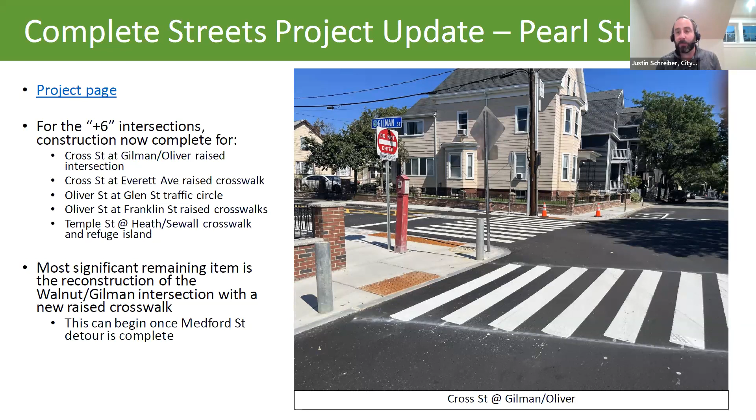As part of that, there's going to be a little 2-way bike lane to connect folks from the neighborway up to the community path. We're holding off on that because of the Medford Street detour, since there's a lot more traffic right now using Walnut, and it's just a little too difficult for the contractors to get in there right now. With any luck, in a couple of weeks we'll be done with that detour and then they can start that work. So we're still planning to complete that this year.

And then Pearl Street itself, sorry, this is actually an image over on Cross Street of the raised crosswalk, but Pearl Street was the big resurfacing project, and that's also pretty much complete. So from McGrath to Mount Vernon Street, there's renewed sidewalks, repaved roadway, some speed humps, even more raised crosswalks, and most of the pavement markings are in.

There's a couple punch list items still remaining, like some pavement markings, some signage, some flexi pave around tree pits—that's an asphalt that lets water go through it on the sidewalk. But for the most part that project is complete. These are just two more photos of the raised crosswalk at Oliver Street and Franklin Street, Glen Street at Oliver. So all in all, really a ton of very high quality traffic calming in East Somerville, which is extremely exciting.

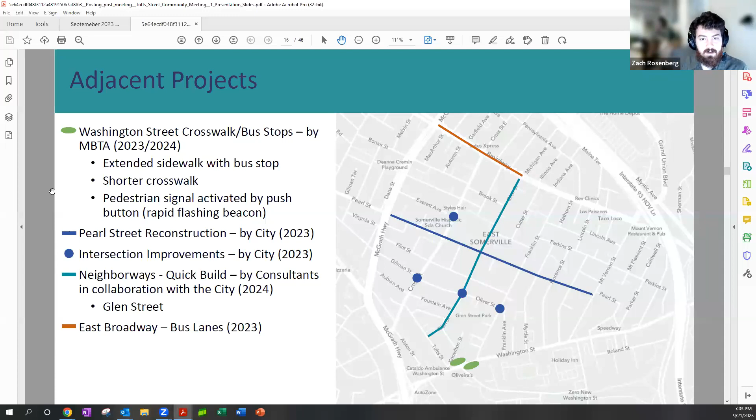I think one of the things we were wondering about is the 90 bus. It looks like it currently goes one way down Tufts Street. In the update I saw, you guys had said traffic changes were not on the table, but we had talked about the possibility of making it one-way in the direction the bus goes, or if the bus route still needs to go on Tufts Street with the bus network redesign.

Kate, are you able to speak to that at all? Yeah, and I'm sorry, would you mind clarifying the question? Are you asking if a one-way street is still on the table? Yeah, so I'm asking if a one-way street is still on the table, and also if the designs you guys have are taking into account the bus currently running on Tufts Street.

And also if you have talked to or heard from the MBTA about whether that route still makes sense, or if it does, maybe adding a stop on Tufts Street. So that was, sorry, multiple questions. That is totally fine, I'm just writing them down so I don't forget to answer them.

So maybe I'll speak to the first one, is one-way still on the table. What we shared at the public meeting is that we are not considering a network redesign for Tufts Street, and there are only two streets off of Washington Street that enter East Somerville off of Washington Street. So we would have to rethink many of the streets around if we were going to take into account one-waying the street, especially in the direction the bus now travels.

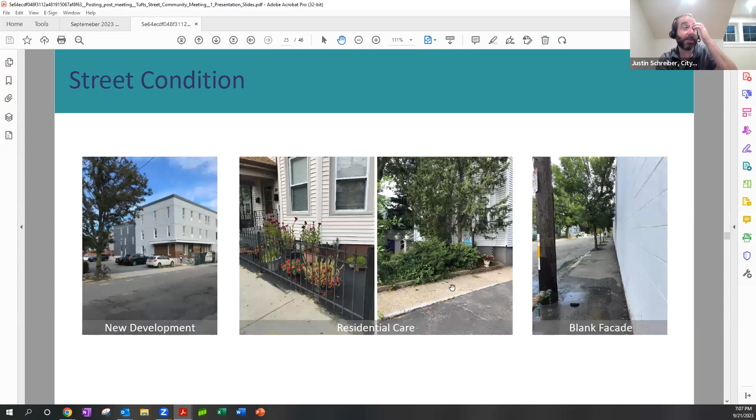I'm not sure I can do justice to what happened at the meeting, but in general there were two options presented. At the meeting on August 30th, along with sharing existing conditions of the street, we looked at two concepts to share with folks and see what their initial reactions were. We named them mid-block moments and meandering opportunities. I'll describe each one.

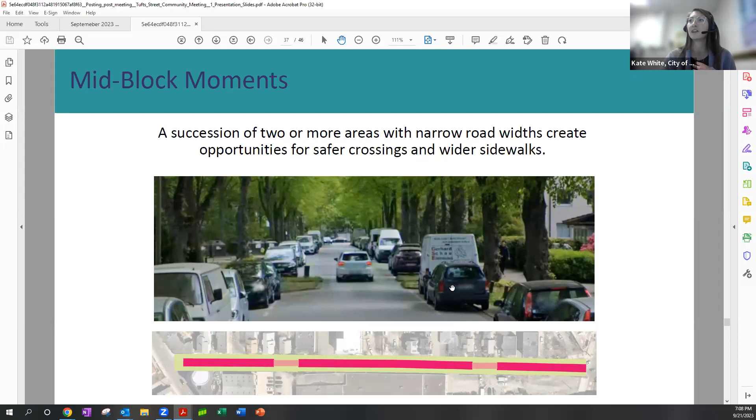With mid-block moments, Tufts currently is quite a straight street. So we're taking the existing condition and looking at a succession of two or more areas with narrow road widths to create opportunities for safer crossings and wider sidewalks. You can see here we looked at about 9.5 feet on each side for travel lanes, with about 10.5 feet for sidewalk, totaling a combined 21 feet, and would use more vertical options like speed humps to calm traffic.

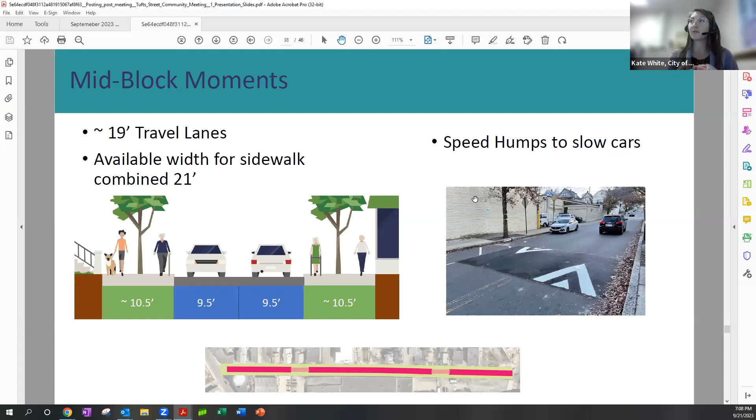When we really pinch the street at those mid-block moments, we could look at anywhere from about 14 feet on each side for sidewalk, and narrow the lane down to about 12 feet, creating conditions where cars would have to wait for one another to pass, but bikes could still pass safely through. We've shown some illustrative options in photos and illustration as well. You could put in a lot more greenery and more landscaping zones.

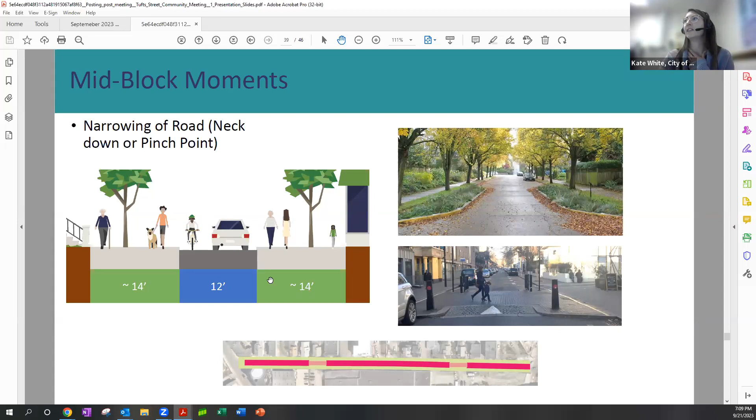In meandering opportunities, instead of more vertical options for calming traffic, we would look at more horizontal options. This is where you would chicane the street to stop cars from barreling through, and this would allow us to have larger areas of widened sidewalk.

We show an illustration on the right that takes a street with two lanes of parked cars on either side, and painted chicanes that make the vehicle veer right, then veer left. This would create what we call a yield condition.

You would have about 12 foot wide travel lanes, with dedicated pullover areas for people driving and biking to allow that yielding when people are traveling up and down the street. This really allows you to have much wider sidewalks, with much more space for trees, more greenery, or just more places to be, since we've heard a lot about narrow sidewalks on the street.

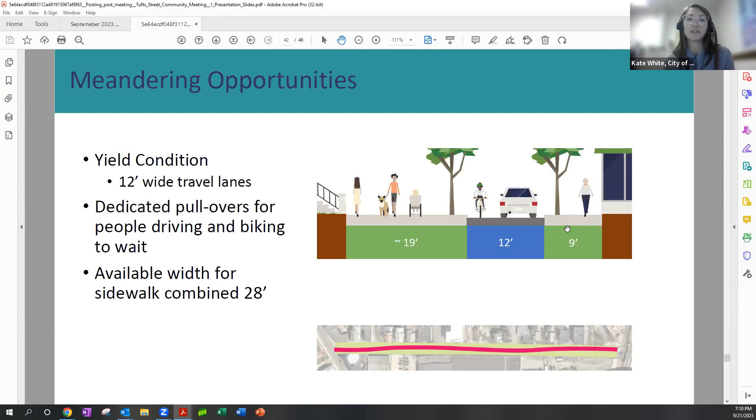So we put out these two concept options. If folks are interested, we've also got a poll on our site to gather feedback in different ways, hearing from folks on the street about these two ideas, having the poll online, as well as one-on-one meetings. So those are the two concepts we showed.

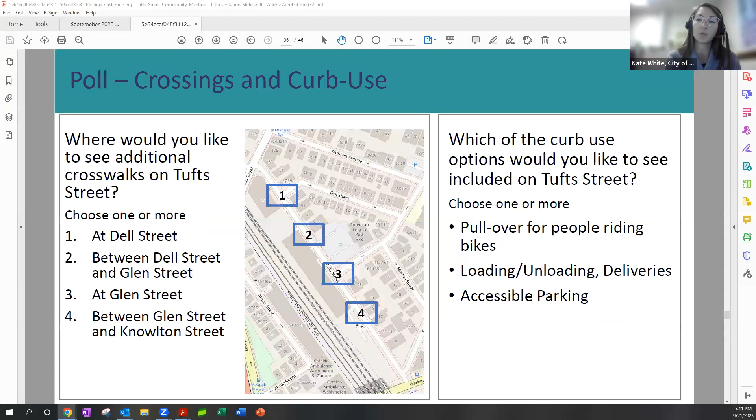We also asked folks about their desired curb uses, and desired locations for crosswalks, since right now we only have crosswalks across Tufts where it meets Cross Street and at Washington Street. So maybe I can pause there on describing the options and see if there are any questions or comments.

Is it fair to say that after all these improvements, the feeling of the street will be similar to Cedar Street?

Because at least in my mind, I'm trying to imagine how it's going to look like. And what I'm imagining is a narrow street with a two-way road and thinner sidewalks, and the feeling that when you go there it's just very busy, very transit-oriented, car-oriented type of road, as opposed to something more calm like you showed in the pictures. Just because the road is quite narrow, if you're going to do bike lanes and two lanes of cars, I don't know how you can put all of them there at the same time.

Thanks, Vitor, for your question. So with our neighborways, our streets designated as neighborways, we don't plan on having separated bike lanes. Our aim with these streets is to really lower our vehicle volumes, really slow traffic, and I can pull up the specific slide.

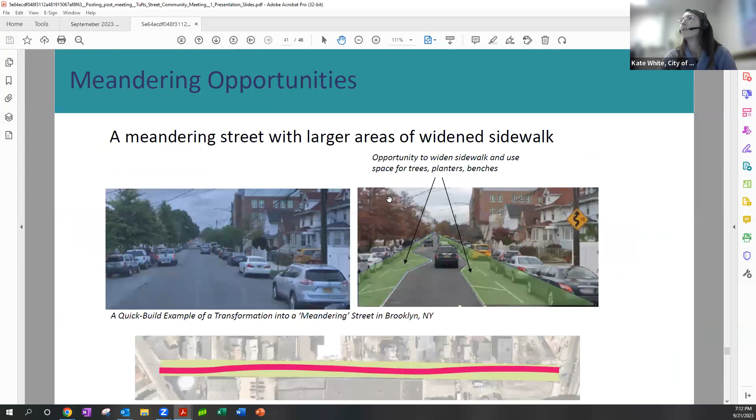If you go to slide 32, Justin, we want to design these to have fewer cars and to make them slower. To give you some thresholds we're looking at, we want to have less than 20-mile-per-hour speeds, less than a total of 2,000 vehicles daily. And during peak hours, you really want it to be less than 50 vehicles, so folks can share the whole space. If you're biking, you can take the whole lane similar to a vehicle.

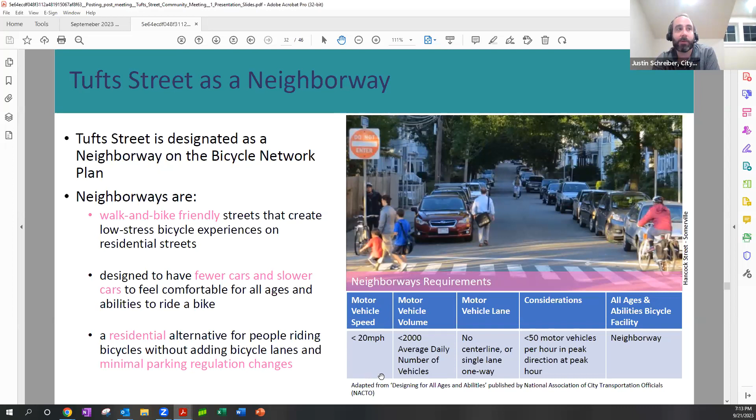In both concept options, we're actually hoping to widen the sidewalks overall, especially from the existing condition, which is definitely quite narrow on one side. So Vitor, there's an opportunity for much wider sidewalks than Cedar, and also a lot lower traffic. This slide shows where we are today, and the brackets show where we want to be. So we're actually pretty close to meeting the requirements for a neighborway.

And I forgot to go back to your question around if it feels similar to Cedar Street. Cedar Street, even though it has chicanes, which is maybe what's making you have that connection, that's where I'm kind of connecting it to. In our meandering opportunities concept, this would be a yield condition along the whole stretch except for the pullover spaces. So you would never have two full lanes.

Oh, I see, there wouldn't be enough room. It would be like some of our more narrow residential streets where one car has to pull over into the parking lane. But it would accept two-way for cars, just one at a time.

Does that work with the new—I know that you are not considering the new bus redesign, but there are two routes going there, the 85 and 90. One is 20 minutes, the other is 30 minutes. So there's going to be three or four buses every hour passing by.

It's just the 90. But Vitor is speaking to the bus network redesign. Oh, right, the new design has the 85 as well, and they changed the time. So I'm assuming there's going to be high utilization for the bus, but only going south, so it's just one way, right? Because the bus doesn't need to go north from there.

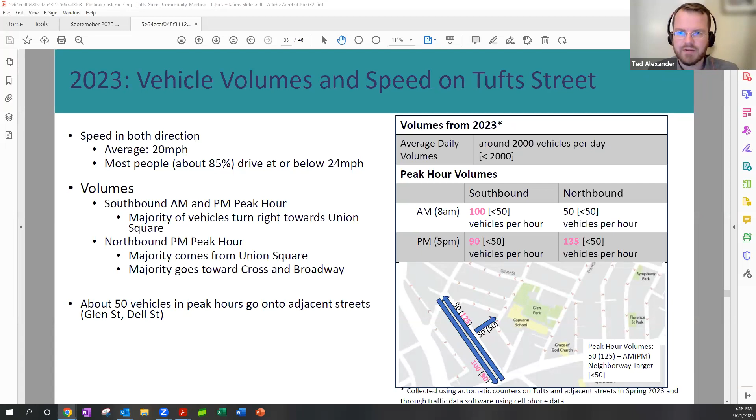Yeah, sure, let me pull that up. The overwhelming thing we heard was that cars drive very fast on Tufts Street, and there's a lot of support for any changes that would make that less likely, which I think all of these options would. Almost everyone who came to the walk had been to the public meeting and seen the options before. While we were walking, we saw cars driving extremely fast, and the street clearly invites that right now. So that's definitely the overwhelming concern people had.

And I think people mentioned about the one-way issue, looking at my notes here, that they thought it would reduce overall traffic volume and be an improvement without making it unduly difficult to get around by car there, from their perspective as people who drive there.

I think there was more support. Several people specifically liked the meandering street concept, as opposed to preferring that over the other one that was presented.

And then we got a bunch of comments. Harriet, who's a member of the commission for people with disabilities, came and demonstrated walking with a cane since she's blind, and had a lot of comments about the tactile strips at the intersections and how they needed to be aligned. I think a lot of that feedback she provided directly to Viola.

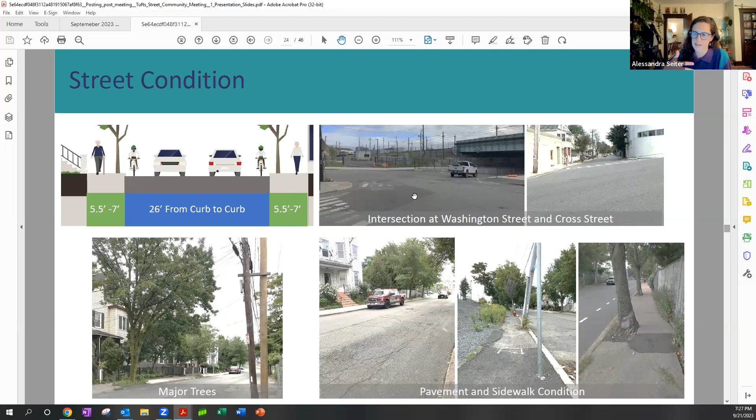I think the thing I would be most supportive of is just widening the sidewalks. Right now, especially on the side of the street that has the gym on it, those sidewalks are extremely narrow and in horrible shape, and especially when you get closest to Cross Street with those kind of imposing facades, it feels really difficult and unwelcoming to walk there. So I would just love to see the sidewalks widened.

I personally like the mid-block moments concept, although I seem to be in the minority with that opinion. But I think it provides a really cool boulevard type feeling.

I'll finish my comment with a question. I know Washington Street, that intersection and crosswalk, is a separate project being run by the MBTA. But my understanding is also that it's been in the works for a fairly long time. So I'm curious if I can be reminded of the timeline of that, and also whether we're confident it will be finished on the timeline we are currently operating under.

It was— or sorry, go ahead, Kate. I think you might have more info than me, potentially. No, I appreciate your patience. We appreciate everyone's patience in this.

We've been urging the MBTA quite extensively on completing this work. We are getting a little bit more confident that it is moving forward, and we hope to have more substantial news at the next public meeting. I know it's not a super satisfying answer at this time, but it's something we are really pushing them on to complete as they had promised to. As soon as we have more updated information, because we know this is a huge interest for a lot of folks following this project, we aim to update the project website and not only share at the public meeting, but respond back into 311 requests we've gotten, and talk to folks on the street to really reiterate what is coming.

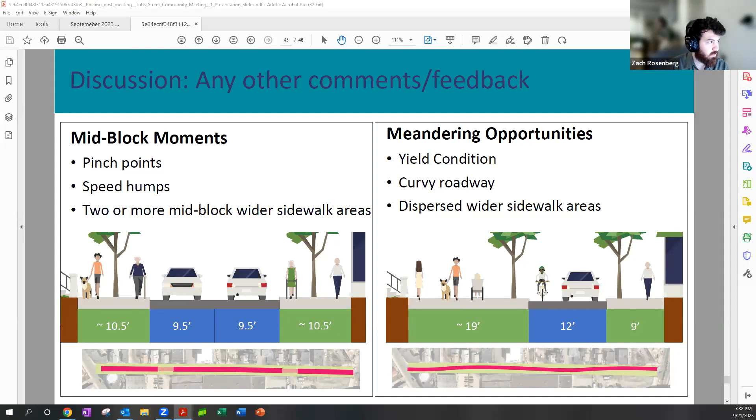Others, comments, questions, Tufts Street, surrounding area. For Tufts Street and the intersection with Tufts Street and Cross Street, do you guys have any idea what you want to do with that intersection? It looks like the grades are kind of strange there, but there's the possibility maybe to have some green space or a big reduction of width at the entrance.

So right now, no, we do not have a specific idea of what we're going to do with it, but we're really excited that the intersection of Tufts and Cross is in the scope of this project. And so it's been fun.

I'm speaking a bit more to the specific feedback we've gotten over the last couple of weeks. There's definitely a lot of interest, especially now with the community path being open, feeling like it's making it easier to connect across Cross Street. We're looking at our different options because Cross Street approaches the bridge. We don't know what that will impact yet. So that's what we're going to be working with our consultants in the engineering division to understand the options. But we're definitely getting a lot of feedback around a desire to make it a lot safer to cross and inviting.

One thing I just wanted to add is just how unique an opportunity this is, because this is a neighborway and we're reconstructing it, which is not how our resurfacing program usually works. Neighborways are much less likely to come up for full street reconstruction, so it's a really unique opportunity. It's such a short street, but it connects the community path, it connects to the new GLX station into East Somerville. As you mentioned, Alessandra, the sidewalks are incredibly narrow and in terrible shape. So it's a really cool opportunity to have an awesome gateway from East Somerville into the East Somerville station, which is actually not in East Somerville technically.